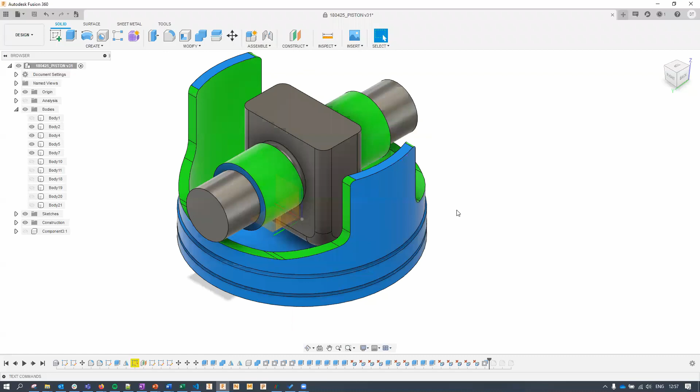So what you have is the geometries defined and created for a generative design setup. If we get into generative design, you would see they have been marked with the right obstacle and preserve colors. So these are your preserves and this is your obstacle. This is the area at which your piston head would then need to connect with the crankshaft inside of your engine block to work.

You will notice I have a bunch of previously solved studies over here. We're not going to solve a new generative study during this session because that's going to take some time, so I've already solved them up. What I had done was I was experimenting with different starting shapes. One of them is this that you see over here. And that gave different outcomes, as you will see with these different studies.

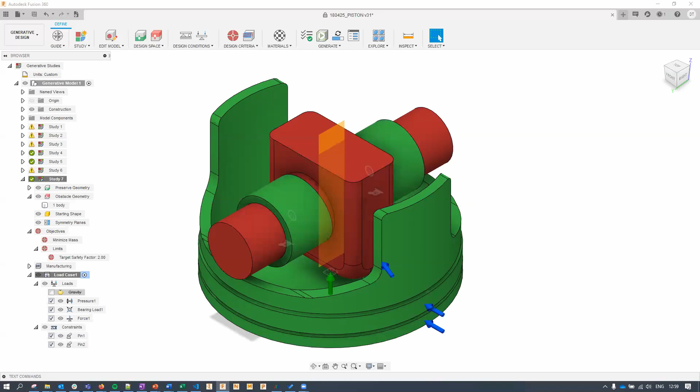However, at the end, I realized that simply using preserve and obstacle without any starting shape gave the best outcome for additive manufacturing using generative design. Everything else was forcing the design to be a lot more conventional, not really made for additive. In some cases, it also made some pretty good outcomes for die casting, for example, but that's not what we were looking for. We were going for additive manufacturing, and hence we're simply going to have obstacles and preserves. There's no starting shape, and I don't have any symmetry too. I was just trying to give it more freedom to come up with something.

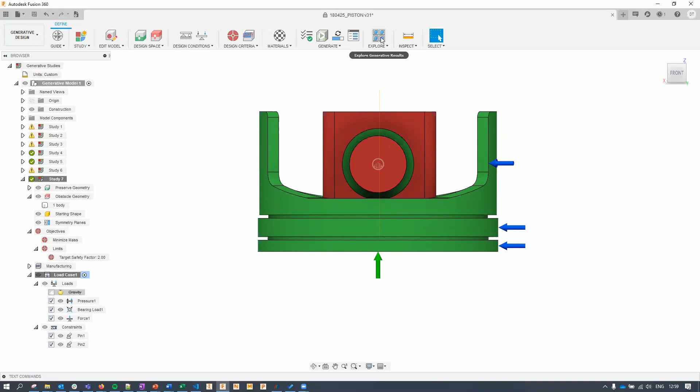The only final thing I would call out on is the loading conditions or boundary conditions I've applied over here, which account not just for the pressure applied on top of this, the head of the piston, but also the extreme cases of a very heavy bearing load should something get stuck, and also extra friction that might push this part inwards. We are looking for minimizing mass, and we are looking for the additive outcomes, which also would mean having a look at the unrestricted outcomes.

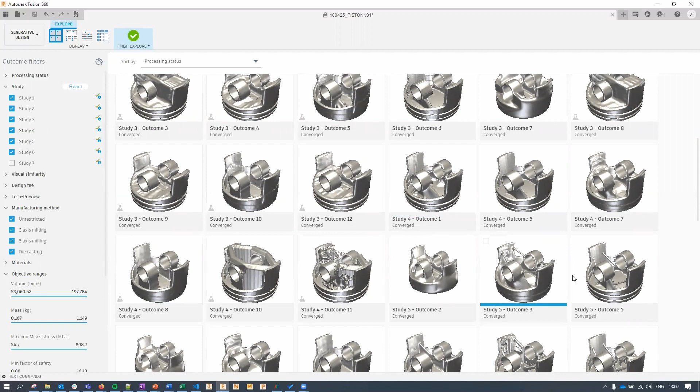So the previously completed studies, as I mentioned, explored a lot of different design spaces. Some of them were making some pretty good die-casted outcomes. Some were making some really stripped down additive examples - these might work for additive, but I didn't think they were structurally sound. Neither were these, which just have really thin beams connecting across. And finally, after the final setup, the outcome I picked is this one over here.

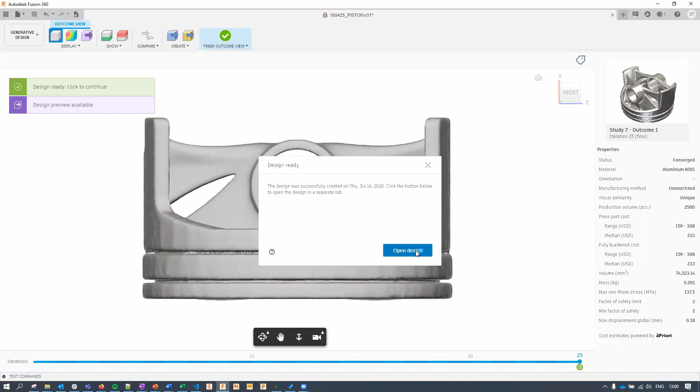I'm not going to go through the complete selection criteria and the process I went through for this part. My goal over here was to focus more on manufacturing. So let's get started with that. Let's open up the design and get it ready for manufacturing, first with additive and then for completing its post-processing with subtractive.

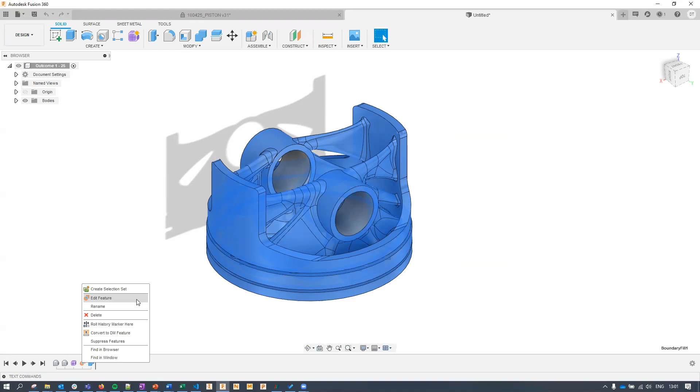Here we have the design, and you will notice there are some little knobby surfaces. This happens very commonly with the BREP creation from generative design. In case you would like to have a deep dive into how to deal with the form workspace and improve your BREP design, I highly recommend a session conducted by James Neville on this topic.

It's also being hosted within this Advanced Manufacturing Summit, with one of the additive tracks.

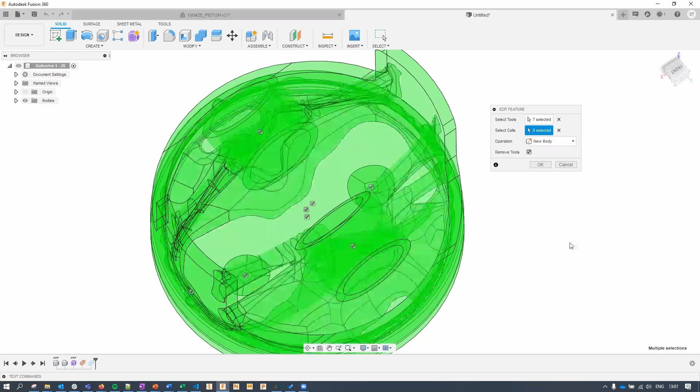In this case, I'm simply going to change certain things within the boundary fill function, not going into a deep dive. What does the boundary fill function do? It's a good way for you to combine open forms and surfaces like you see over here.

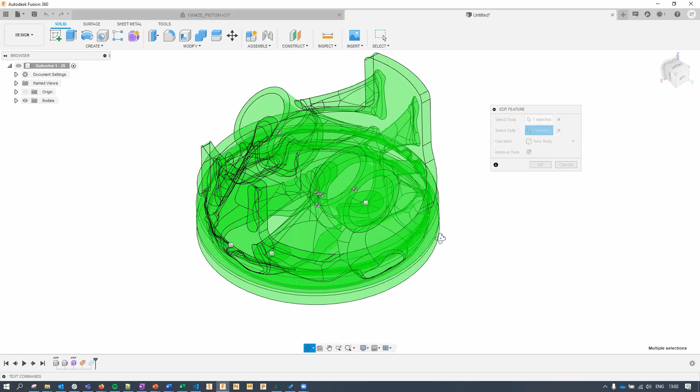All these surfaces that have been made, along with solids, which were the preserved regions that you would have created upfront. I'm simply deselecting the open forms and surfaces I don't want to be considered for creating the final geometry. You'll see that I simply don't want these extra knobby surfaces, and I'm just deselecting them, and that should bring me back into just the generative surfaces that I'm interested in.

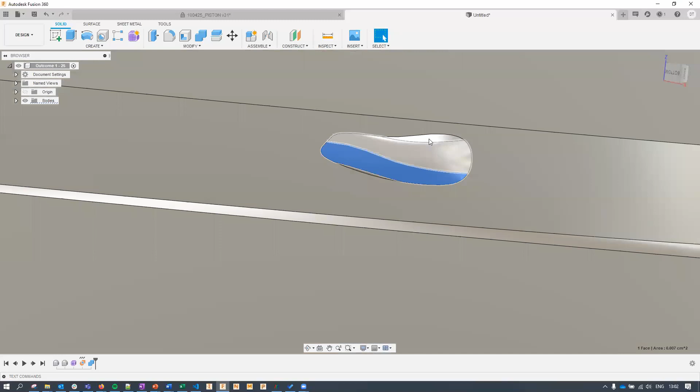Oh, there is a little patch of surface still left, and that's fine. I'm going to go back into boundary fill to remove it. I'm simply going to select it all and hit the delete button to get the job done.

Now this is the part that we need to make, but let's call this the final outcome. This does not really have to be what we need to print. What you pass into printing can be a lot more simplified.

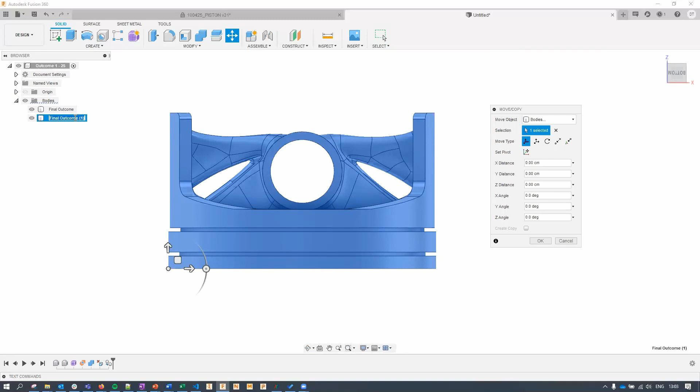Let's start working on it together by simply copy pasting this, and let's call this the additive outcome. For the additive, we can extend this because we don't need to add support structures to the bottom for this, since it's going to be flat anyway.

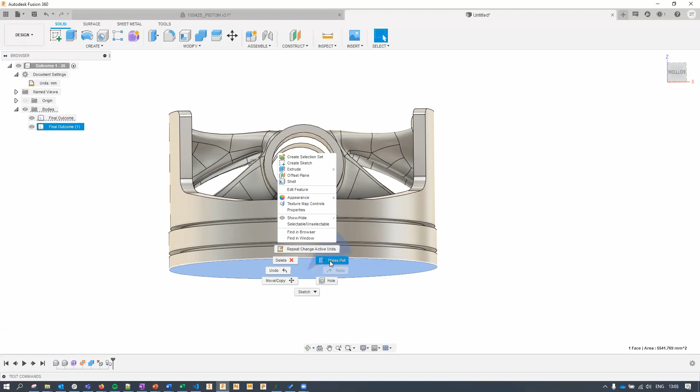You can simply choose to put it down on the build plate, and to do that we need to account for some extra material that can be cut away. So 1 mm down there should suffice.

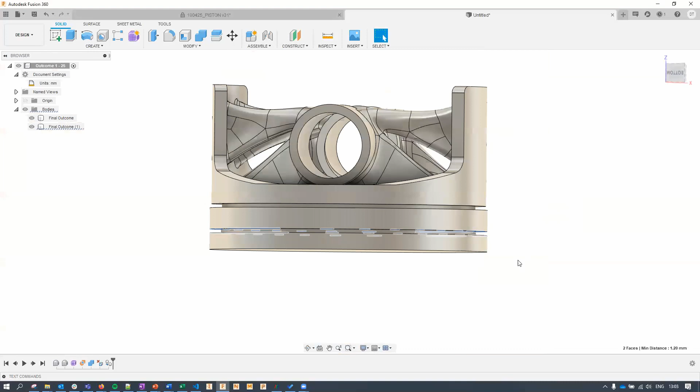We also don't need to have these grooves. They're really small grooves, just 1.2 mm apart, and they can be something that will be machined away later, and they're actually preferred to be machined away. So let's simply close them up too, as they are features within the geometry which are not necessary for printing, but more necessary for the final outcome, which can be machined.

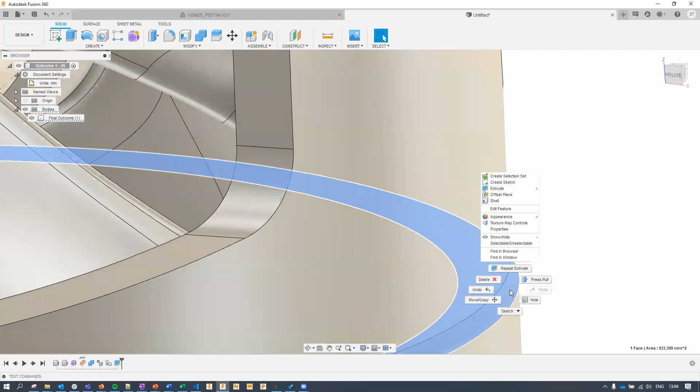Repeat the extrude and get things done over there. One could also say that these surfaces need to be machined away, so let's make an offset for them too.

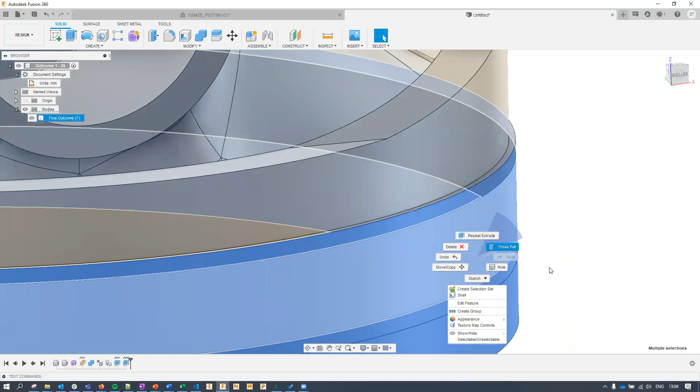An mm of offset, and similarly an mm of offset over there. This is for, yes, I think I need to add an mm.

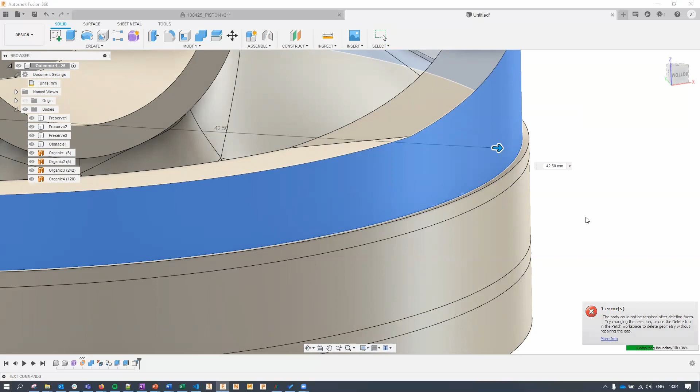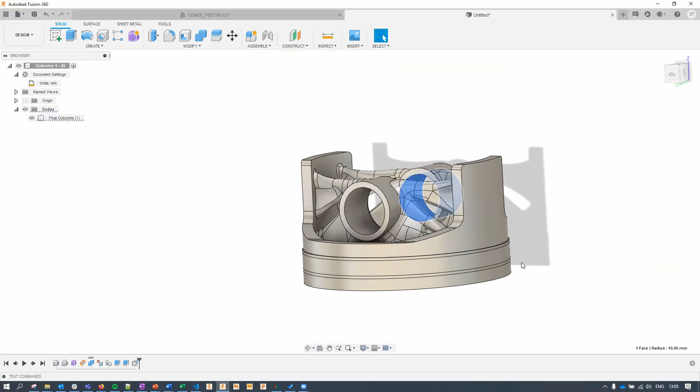We could also close these holes up if you want to, but that's fine. We'll simply remove support structures from them, and they'll be drilled away later anyway. We don't really need to print so much extra thickness over here. That is not necessary, we'll simply support them. And that's it - that would be our setup that needs to be accounted for the final outcome.

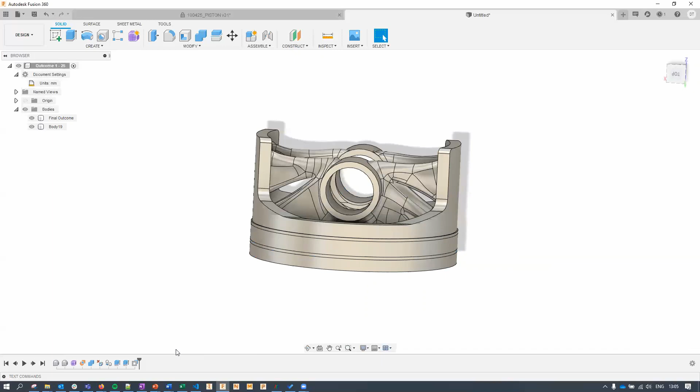Oops, I seem to have made a mistake of doing all my operations on both the geometries. That means I now have everything joined together. That is my bad - we need to make things as new geometry.

Even my name change did not stick, funny, I don't know why. So let's rename that to additive outcome, and we need to simply boolean these things together with these two so that combines, and then we get the final outcome. So we have the final outcome and the additive outcome.

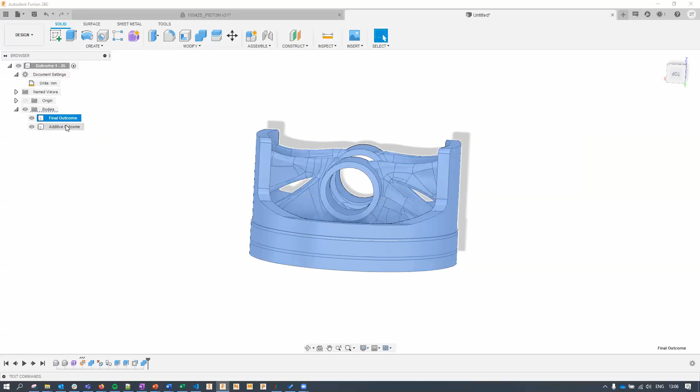The final outcome is what we actually need to use - that is what will be printed and machined - and this is what we simply need to print.

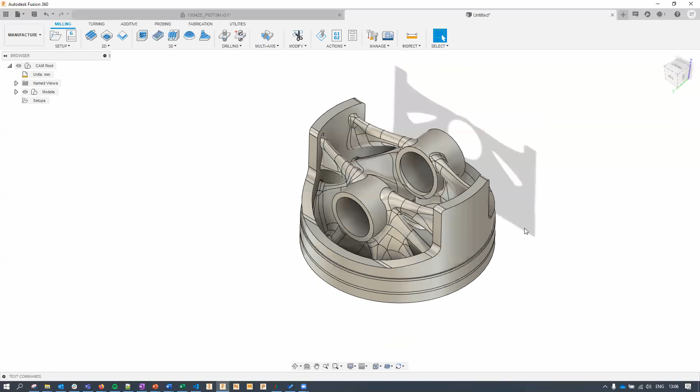Okay, now let's get on with the manufacturing setup. I would like to call out at this point that what I'm going to do is metal additive manufacturing setup first. So I'm going to select my machine - let's pick the Renishaw machine because I like working with that.

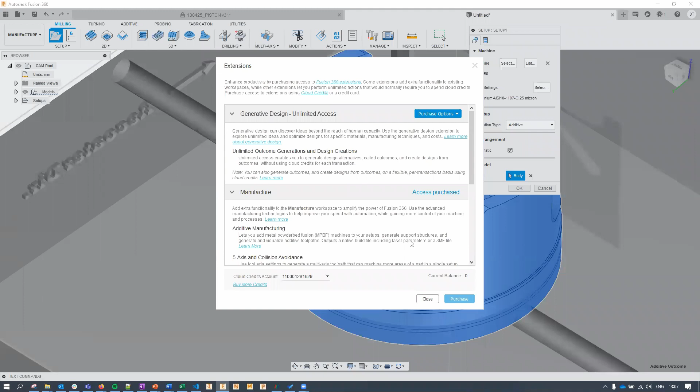It's important to note that this machine would only be available once you have selected the manufacturing extension, or kind of subscribed to it from here. By default, Fusion only has the FFF machines within its additive workspace. Should you want to have the metal machines also, you will need to subscribe to the manufacturing extension, which I've already done in this case, and hence I could select the Renishaw machine.

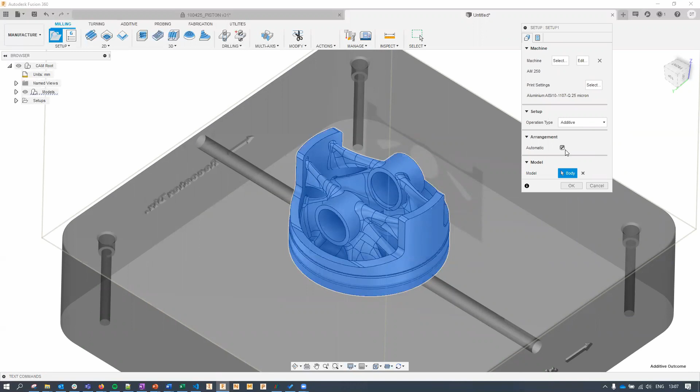It's printing in aluminum, that's fine. It's doing the automatic placement, that's also fine. The only thing that I would change is I would put this down on the build plate because we have already added offset over there. Don't need to have it floating, with the bottom surface supported.

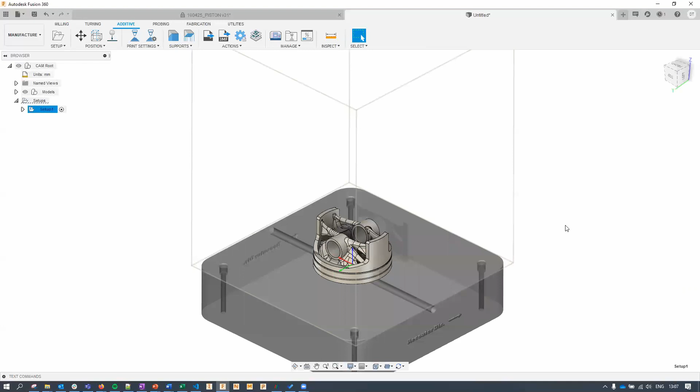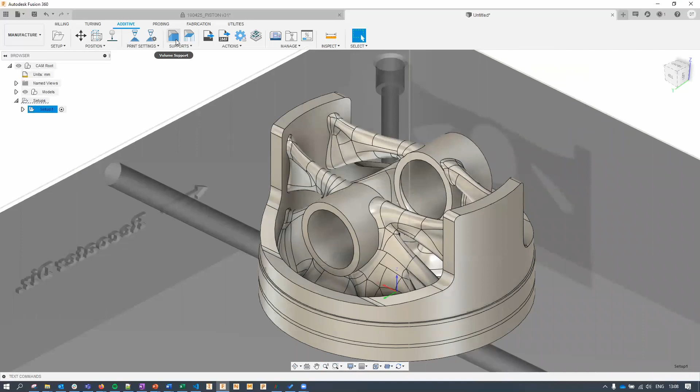I don't really need to orient it because this part was made with the additive constraint in mind, so we know that it needs to kind of grow and bridge up these gaps. We don't really need to orient it or turn it in any other way. The only thing that we now need to do is add support structures, and we're going to add some volume supports. We're going to add supports to this entire body.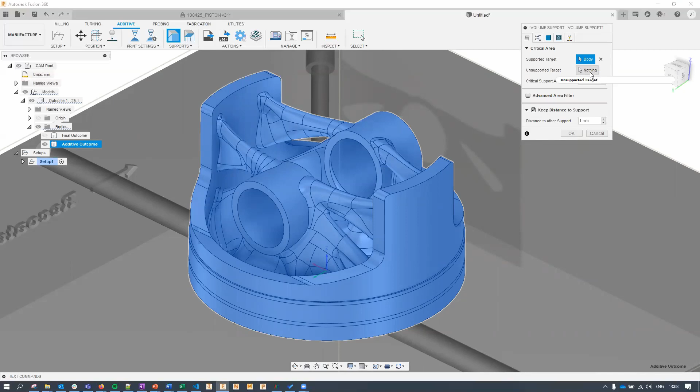So I'm going to go there and select the entire additive outcome as something that needs support. And just for the sake of doing things a little bit better, I'm going to make these two things as not supported, because we are going to add some special support structures there, something that's a lot more dense. Everything else, these little areas which might need support, just these small gaps that you see, we're going to support only those with this support action.

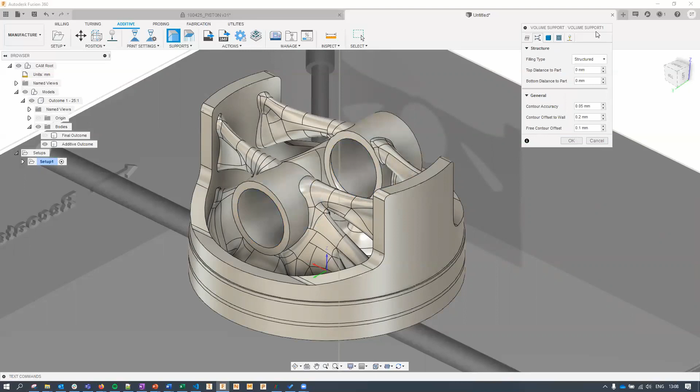And I'm going to do that by keeping it structured. Yes, that's what we want. We want it to be a punch plate. We want it to be sparse. We want everything to be as sparse as possible, because we don't really care if that bit is really well defined, because it's only going to be very basic supports. Breaking point everywhere, that's good. And we will have support structures created for everything except the holes.

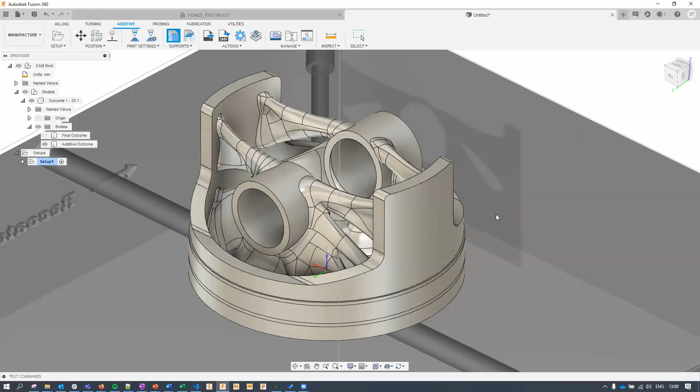Now, why did I choose not to have support structures within the holes? That's because I would like to create more dense support structures over there, something that's going to be a lot stronger, purely because that is a more important area for me. I know that I don't want any problems in that area, and I simply want things to be stronger there.

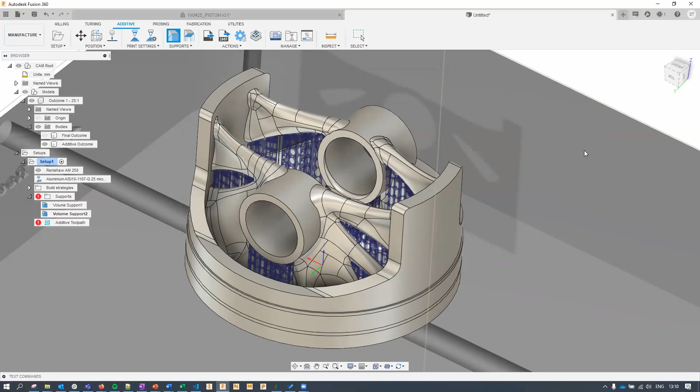So I'm just defining everything pretty much similar to what I did in the past, but I'm just making it stronger. My fragments are smaller so that they don't have large fragments, so they're all densely packed together. I have my density of the structures to be dense, and I'm going to keep the top part and bottom part connection to be strip, just to keep them extra well defined. And that should soon complete. There we go. That's more densely defined support structures in that area, a little bit more sparse on the outside. That looks good.

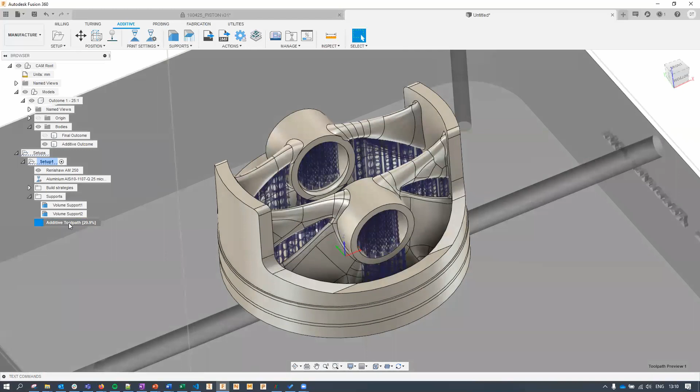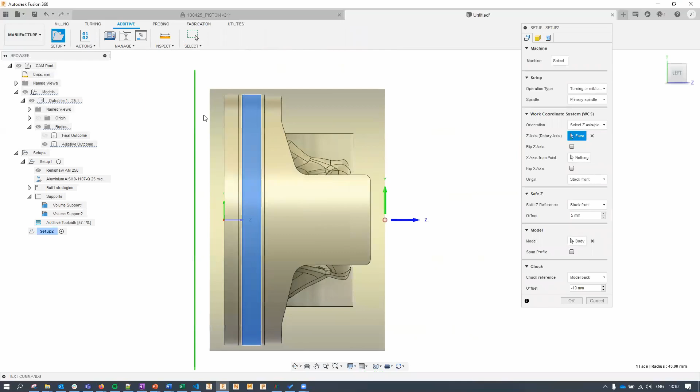I can now go ahead and create my toolpaths, and after that I can continue to process my machine ready file. But while that is happening, I can now start to work on my next setup. What is my next setup? That was meant to be for turning, because we need to machine this part. So I'm going to pick my turning setup, and I have some machining to do on this end too. So I'm simply going to say that my chuck is on this end, so the part is going to be held over here, and then all the machining operations will happen from this side of things.

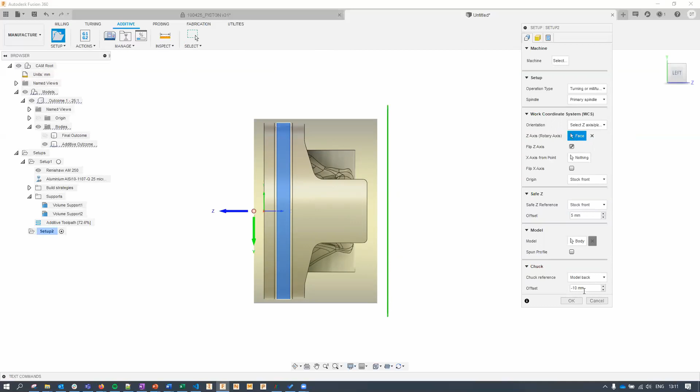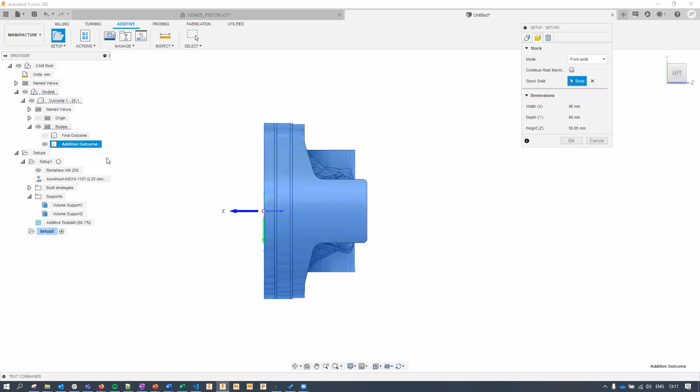I will need to ensure that I'm selecting the right stock body and the right model body. In this case, the body which we need to create is the final outcome. It's not the additive outcome. The additive outcome is actually something that is going to be consumed as the stock. So we go into stock and change it from the fixed size cylinder to a solid. And the solid is our additive outcome, because that is what we're going to give to the machining setup to start processing. There's no other changes that I need to make. It's all fine. I'm going to click OK. And we can now proceed with the turning setup.

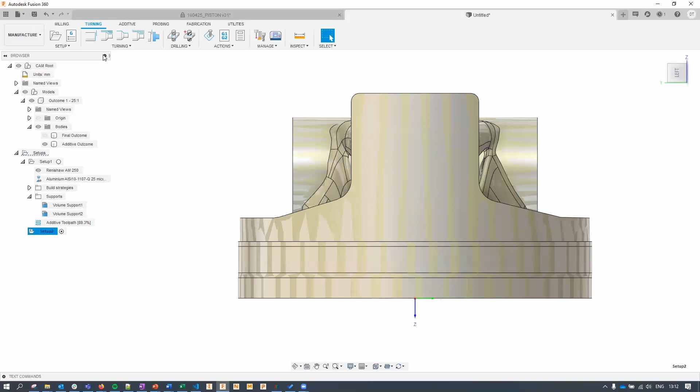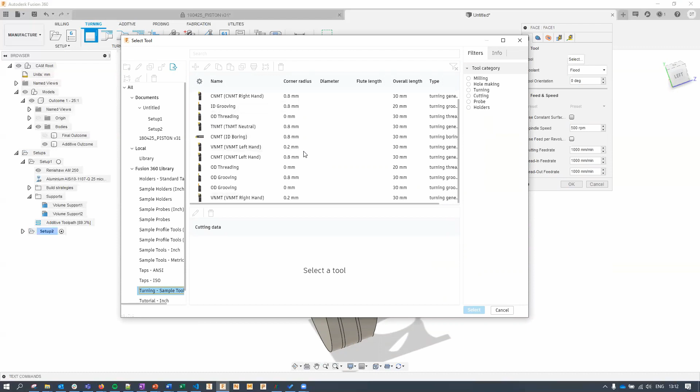One of the great parts of working like this on Fusion 360 is that you can see that my additive toolpaths are still getting calculated, but I didn't really need to wait for that job to be processed. I can proceed with the next of the steps. I'm first going to remove this extra mill of material that we had offset from there. I'm going to do a face turning operation by selecting a tool. Let's go into the turning sample tools. Since I don't really have a specific machine in mind, I'm just dealing with everything from a sample point of view. These are just basically defaults.

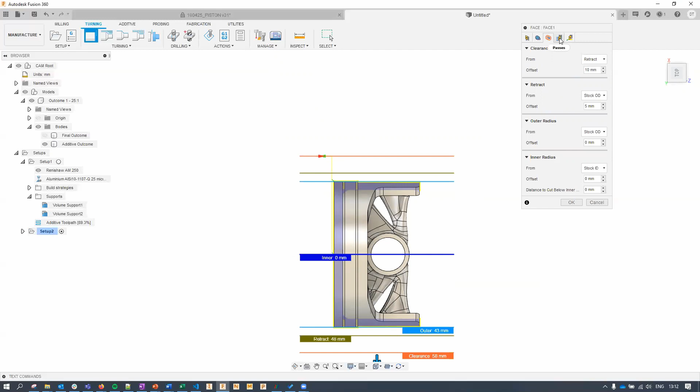So we have that selected. We know that we need it to be done from the front. That's correct. The clearance and the geometry that it needs to work on, it's also correct. Nothing much to change over there. We need it to complete with no stock left behind. That looks okay. And if I were to simulate this, you can see that it will just simply go there and remove that extra mill of material that we have added.

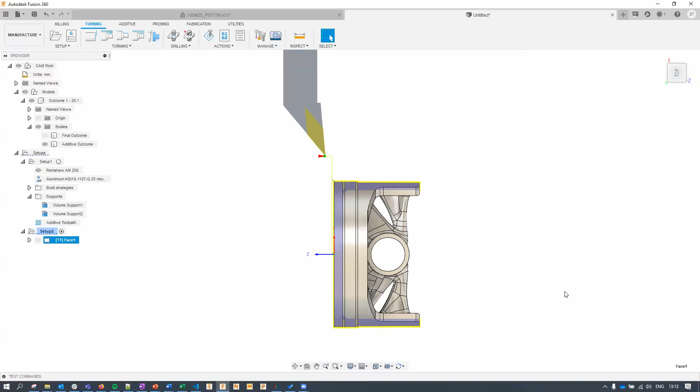All right, now let's go ahead and change this profile. That's like this outer profile that we have. I can choose to do it as a roughing or finishing. I'm simply going to pick finishing because it's just the last bit, like the last millimeter that's left behind. It's not that rough an operation that I'm trying to do.

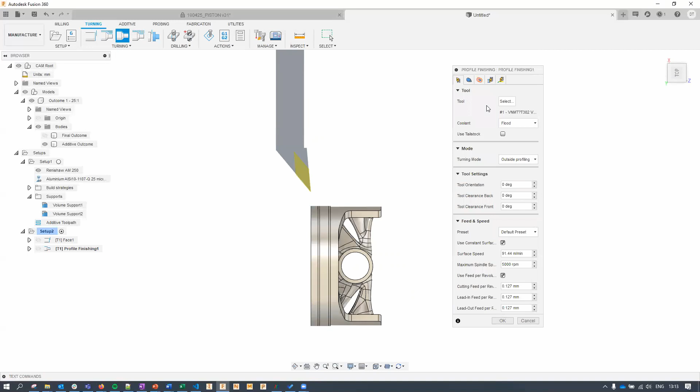I'm going to select the same tool. The same tool is fine with me. Not going to change much. It was anyway selected from the previous setup. Everything else remains the same. Let me just give it just a little bit outer clearance and let it do it in step overs of 0.5.

And I don't need to make it do any grooving because the grooving is something that we can do as a separate operation with a specific tool. We don't need to leave any stock behind. Click OK. Oops. That's the wrong option for me to change. This is what I wanted to change.

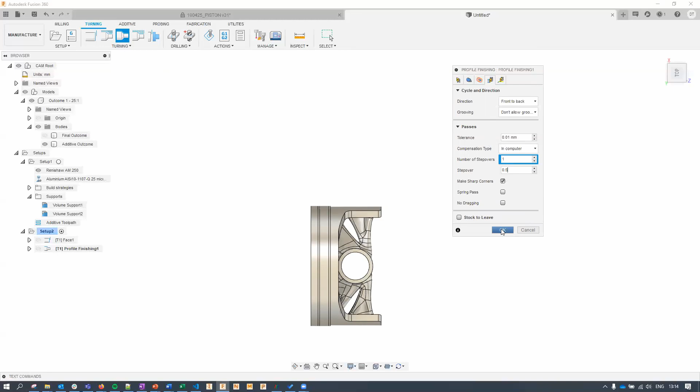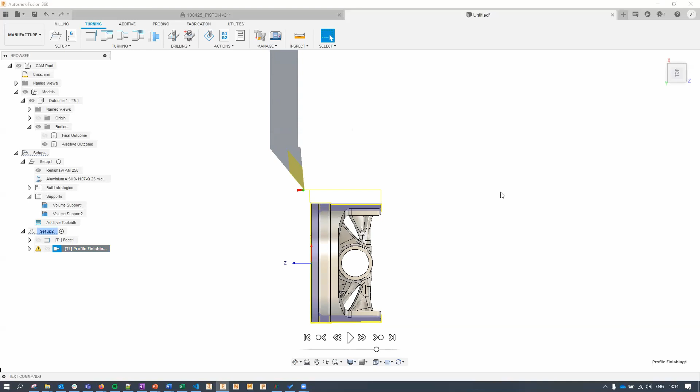And that's done too. It's given me a warning. The lead out had to be modified so that it does not enter into the stock. Fair play. I should have selected that. And it's good to know that that change has been made for me, so I don't have to worry about it.

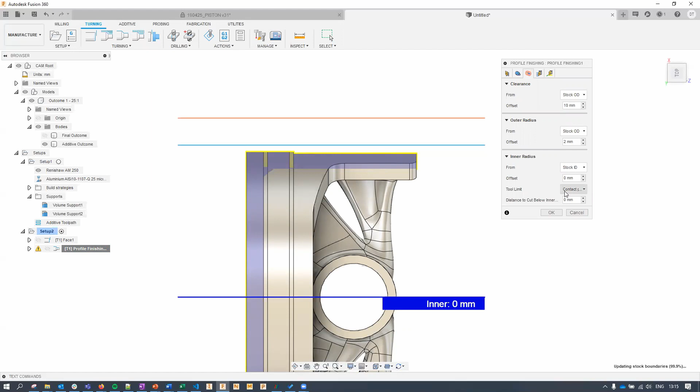I seem to have set it up so that it's missing this little step in. So I think I need to go ahead and change the toolpath. Give it a little bit more gap to work with. Front to back, everything is fine.

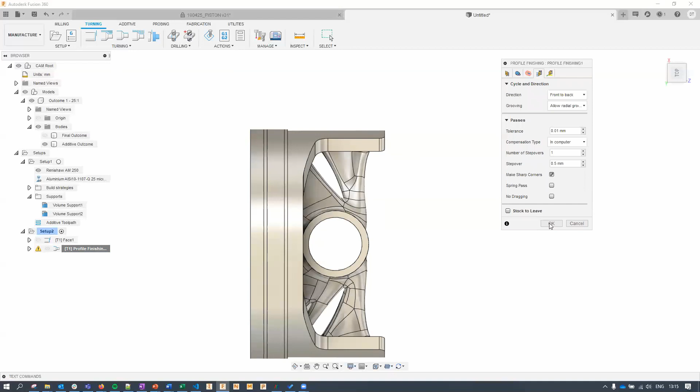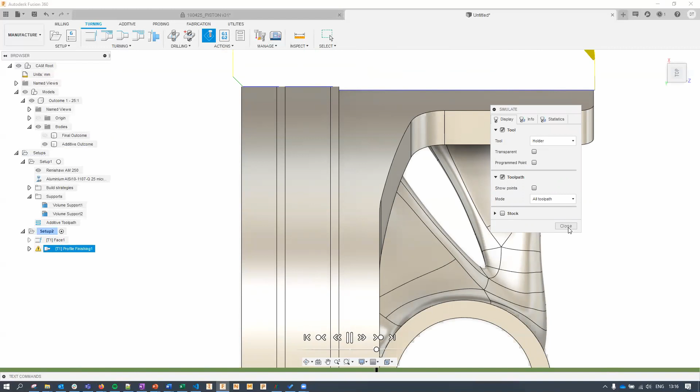And I think I'll just allow it to do the grooving so that it tends to pick it up at least, which it will now. Yep. Okay. Okay, that seems to be taken care of. We can now proceed with the final grooving operation to make these two grooves.

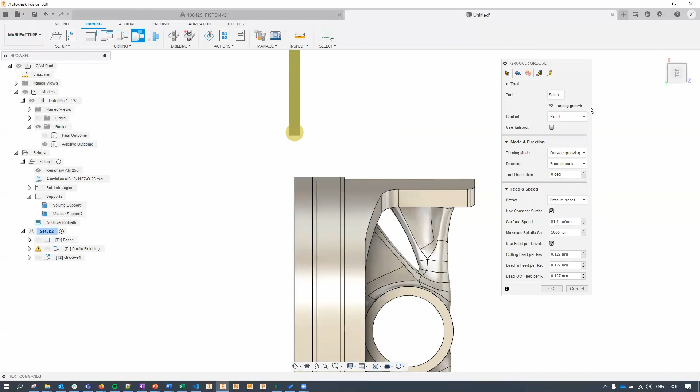And for that, we are going to select a new tool because the previous tool will not work. That's not a grooving tool. I am going to pick the OD grooving tool, select that. This is also a little bit too large, so it is best to reduce it to something that actually can fit into the groove. We do that by changing or editing the preset that we have picked. Now I'm simply making these changes to reflect the size of the groove that I need to machine.

Ideally, you should try to work with a tool that you know you have access to on your machine. I don't really have a machine in mind, and hence I'm making these assumptions that I'll be able to get a tool that's going to be doing what I'm typing out over there.

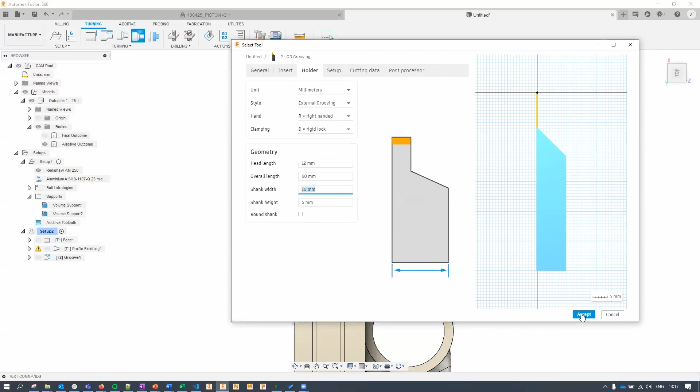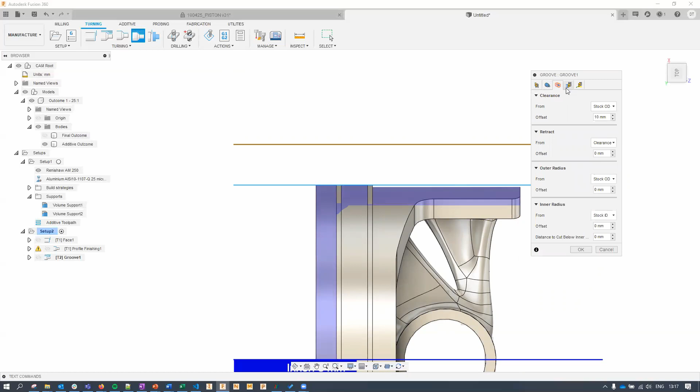Okay, I accept that, select that. Cool, that is a new tool that we'll need to go in and finish up these grooves of 1.2 mm, and hence I selected its width to be 0.6 mm. We'll keep it the same in the geometries. I will keep it the same in terms of the clearance and the outer and inner radius it needs to work with.

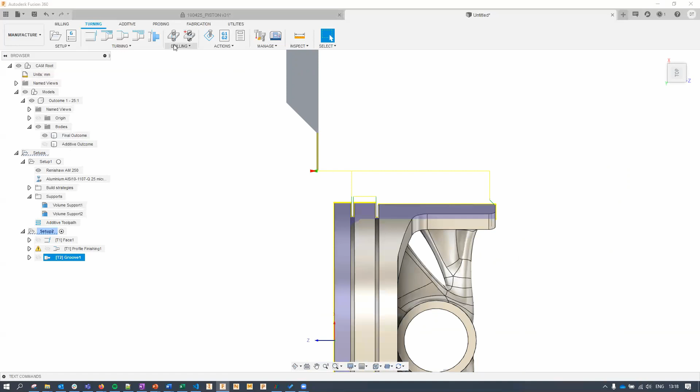This has to be 0.6, and my step over also has to be 0.6. There's no stock to leave behind, and that should be that. And once that's done, you'll see that it's going to be going into the grooves, and running the simulation on that will show it. Okay, that's done too.

And with that, we have completed the machining setup also. And at this time, we have also managed to complete our additive setup. I could create the post for this and post it out to my turning machine for this to be milled. And at the same time, I can also post out the Renishaw slice stack for that machine to consume and start to print the part.

So there you have it. It was an end-to-end additive manufacturing setup completed 100% within Fusion 360 with all the operations accounted for within the tools of the design workspace, the generative design workspace, and the manufacture workspace.